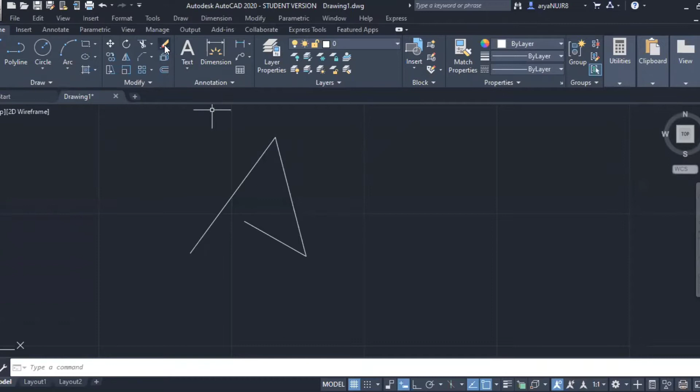The next one is the erase tool. If you want to delete any object, you can use this erase tool. First I am choosing the erase tool, then I select the object, then press enter.

The next one is the copy tool. So for that, I'm just drawing a rectangle here. I want to copy this one. For copying that, I can either use the copy tool on the modify panel or use the shortkey CO. First, I'm selecting the object, then CO, enter. Then I have to specify the base point, so I'm just picking this corner point.

Then if I want to give a specific distance, I can give the specific distance or pick any point on the screen. So I'm just picking a point here. And if I want multiple number of copies, I can make it.

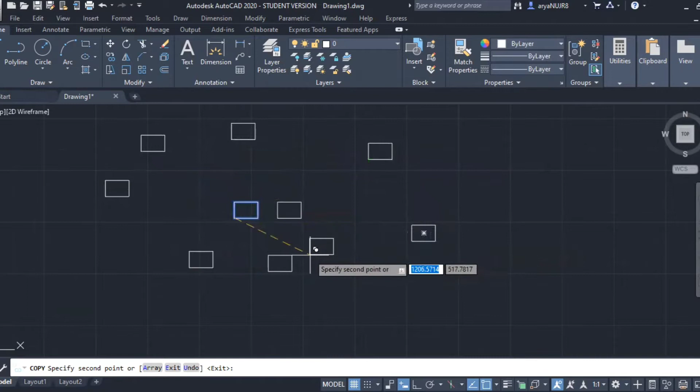So if I want to make a set of copies, say 10 number or 5 number of copies, how to do it? For that, I have an option on the copy tool itself. I'm just selecting the object, then copy tool, and specifying the base point.

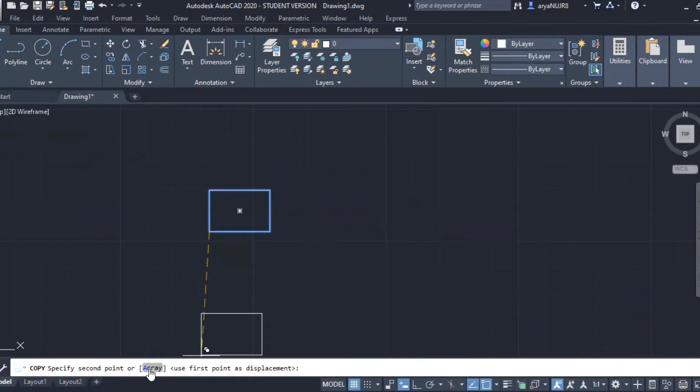Then here you can see an option called array. I'm just clicking on array. Then I have to specify the number of copies, so I'm giving the number of copies as 5 and press enter. Now you can see 5 numbers of copies of the object gets created.

So I can place it wherever I want. And here you can see the distance between the base point of the source object and the copy object is being specified.

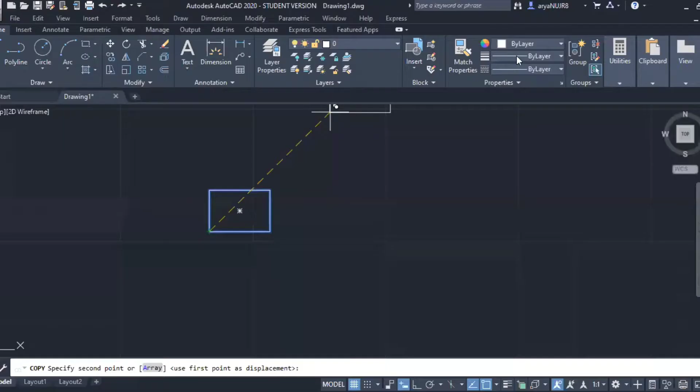Here you will be specifying the distance between the copies. That is, if I place a number of copies, say 5 number of copies, and I specify a distance like this, the distance which I have specified will be from this point to this point. So all the other copies will also be created at the same distance.

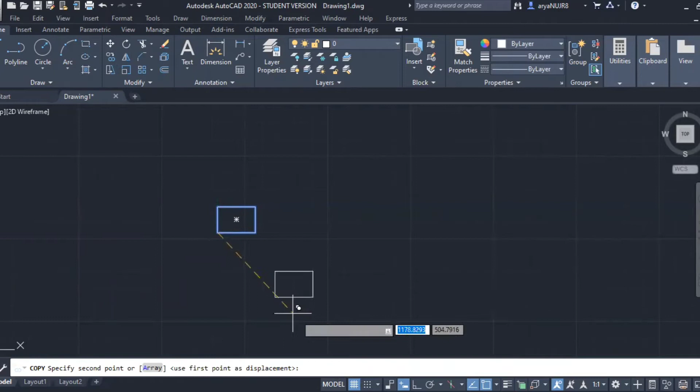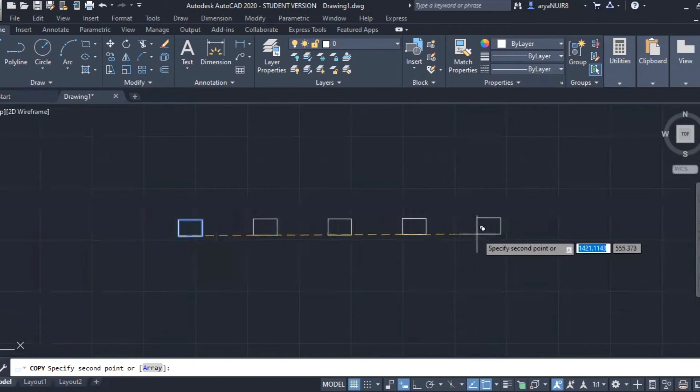Then again, I'm selecting the object, copy option, enter. Then I specify the base point here. Then I'm using the same array tool and specifying a number of copies as 5 again, and press enter. Now I have to specify the last point, that is the total length. In such cases, you can go for this fit option. Just click fit, and then you can specify the last point, that is the total length.

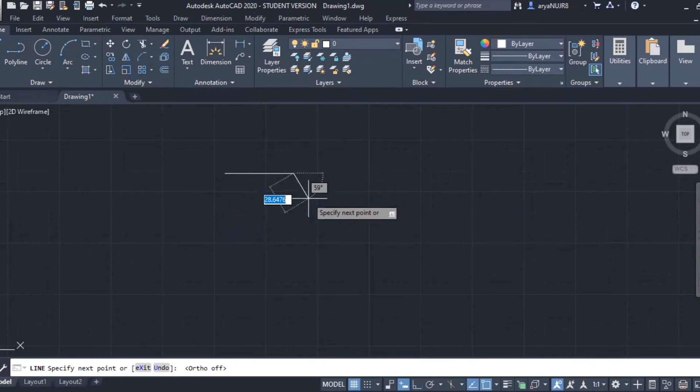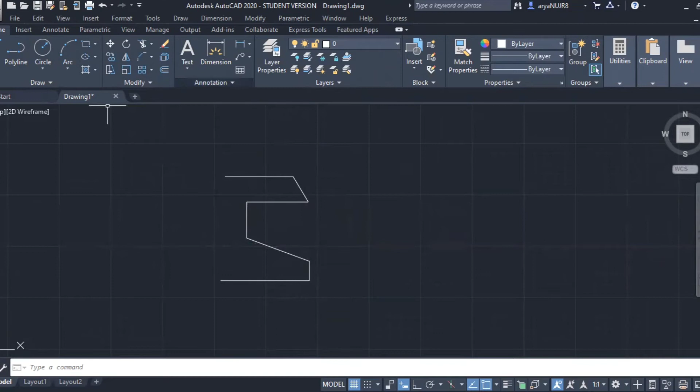Then the next modify tool is the mirror tool. The mirror tool is used for making mirror copies. For that, I'm just drawing a shape here using the line tool. I have to mirror this one to the left side. For that you can use this mirror tool, either on the modify panel or using the shortkey MI. I'm just selecting the object, then MI, enter.

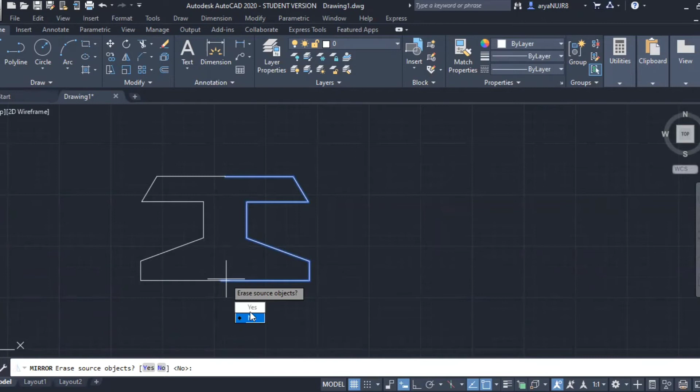Then I have to specify the mirror line, so I'm picking this point as the first point and this one as the second point. Now it asks to erase the source object, yes or no. If I want to erase the source object, I can go for yes, otherwise no. I'm clicking the no option here, so the source object is not erased. So that is about the mirror tool.

Then the next one is the fillet tool. If I drop down here, you have three options: fillet, chamfer, and blend curves. The first one is fillet.

So for that, I am just drawing a rectangle here. I want this corner to be curved, a round corner here. For that, you can use this fillet option. You can either choose it from here, or use the short key F. If I press F, enter, I get the fillet tool. Here you can see options like polyline, radius, etc. First I have to specify the radius, so I click on this radius option, then specify the radius. I'm giving the radius as 10 centimeters and press enter.

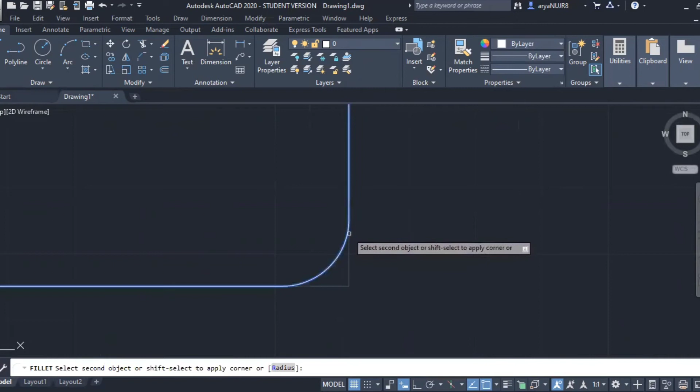Now I have to select the first object and then the second object. I want a curved corner here, so I'm selecting this one as the first object and this one as the second object. Now we can see a curve gets created.

If I want to do this multiple times, for these three corners at a single step, I can do that also. I'm again going for the fillet tool, and here you can see a multiple option. So again radius, then click on this multiple, then you can use this multiple times.

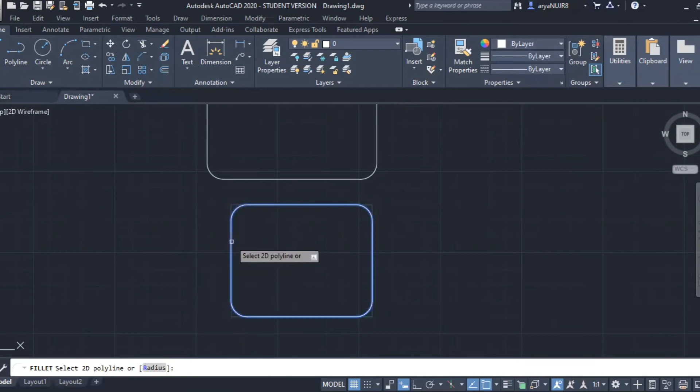Also here is a polyline tool. If I draw a rectangle once again, a rectangle is also a polyline, a single selection. So I'm again going for the fillet tool. If I click on this radius option, I specify the radius, then click on polyline. Then if I select the rectangle, all the corners get filleted.

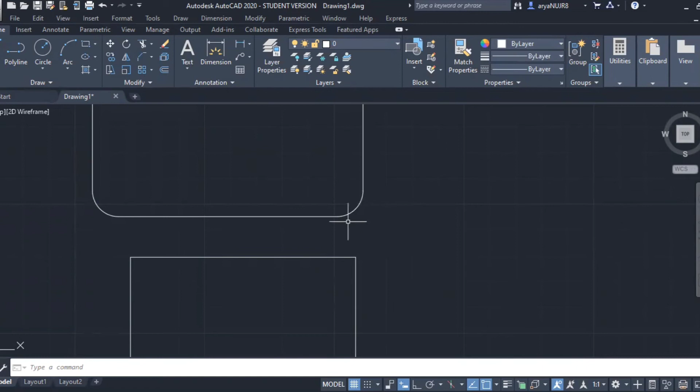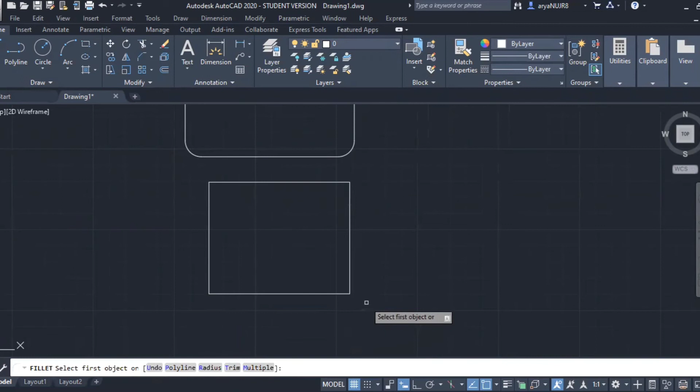Here you can see, as I fillet this corner, these two lines get deleted. If I want the two lines to be retained, I have an option on this fillet tool itself. I'm again going for the fillet tool. Here you can see an option called trim. If I click on this trim tool, I have trim and no trim. If I want the lines to be retained, I can go for no trim, and then select the lines. Now you can see a curve gets created and also the lines get retained there.

So that's about the fillet tool.

Then the next one is chamfer. For chamfer also, I'm just drawing a rectangle here. You can either use the short key CHA or choose a tool from the modify panel. So the short key is CHA, enter. Then here I have the distance method and also the angle method.

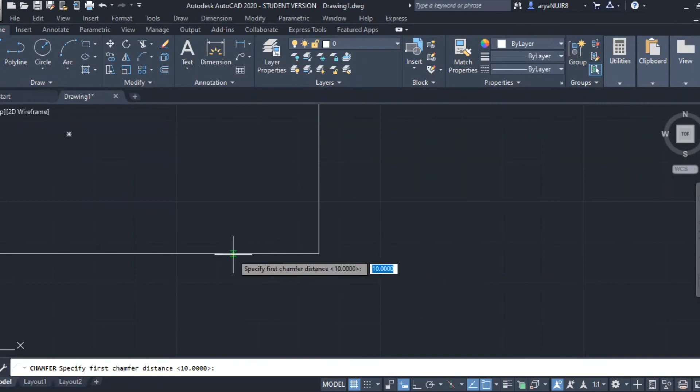If I go for the distance method, I have to specify the first distance and the second distance. The first distance means the distance from this corner point on the first line, and the second distance means the distance from this point on the second line. On the first line I want the distance as 10, and on the second distance I will give 20, and press enter.

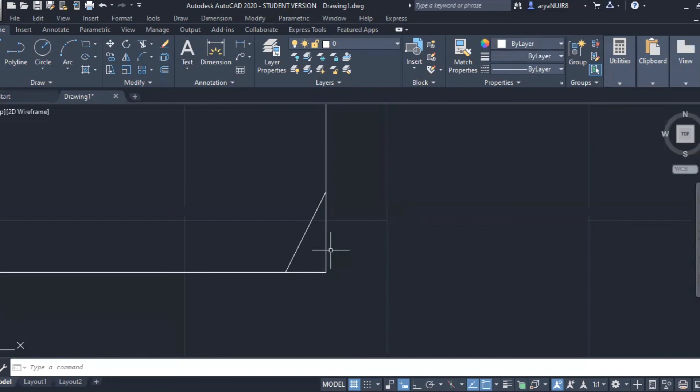Now I have to select the lines. If I select this line and this line, you can see it gets chamfered, and also no trim option is enabled, so the corner line gets retained there itself. If I want to trim it, I can go for CHA, enter, here select trim, and then select the first line and then the second line.

As with fillet, here also you can use the polyline option. CHA, enter, then polyline option, simply select the object.

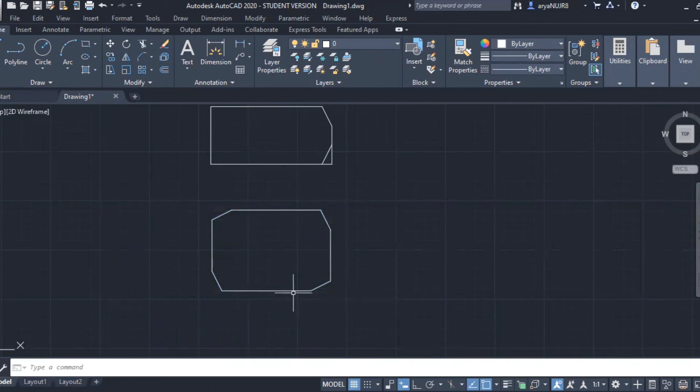So if I want to specify the angle, I'm again drawing a rectangle here. Then select the object, CHA, enter. Here I have an option called angle. If I want to specify the distance of the first line and the angle of the second one, I can use this angle option. If I click on this angle option, I give the first line distance as 10 and press enter, then specify the angle as 30 and press enter. Now I have to select the two lines.

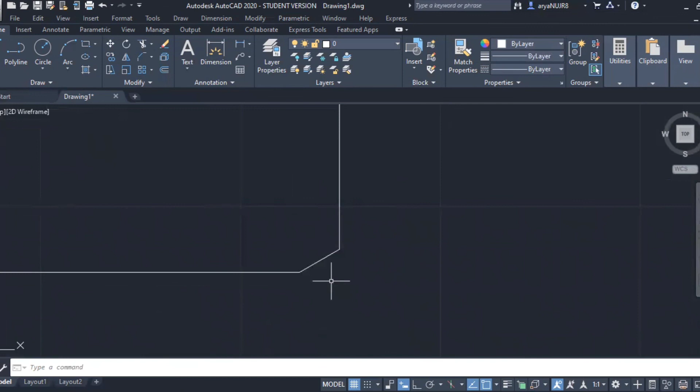Now we can see, first I have to specify the distance, that is the distance from this corner point till here, and then the second one is the angle, which is the angle of this line. So that is about the chamfer tool.